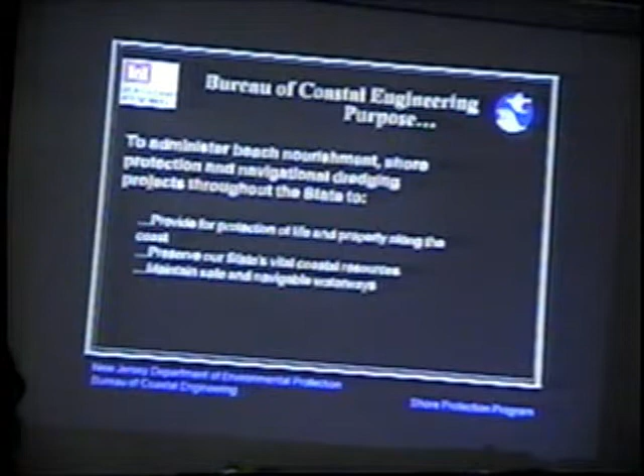The purpose of the state's Bureau of Coastal Engineering is to administer shore protection and navigation dredging throughout the state of New Jersey for the citizens of the state of New Jersey. I'm not going to read everything that's up there.

The legislature has provided stable funding for shore protection for the state of New Jersey through the realty transfer tax. Currently, our funding level is $25 million annually. That funding allows us to cost share with the Army Corps of Engineers and be able to match. To date, we've been able to match every federal dollar that has come to the state of New Jersey for shore protection for its citizens.

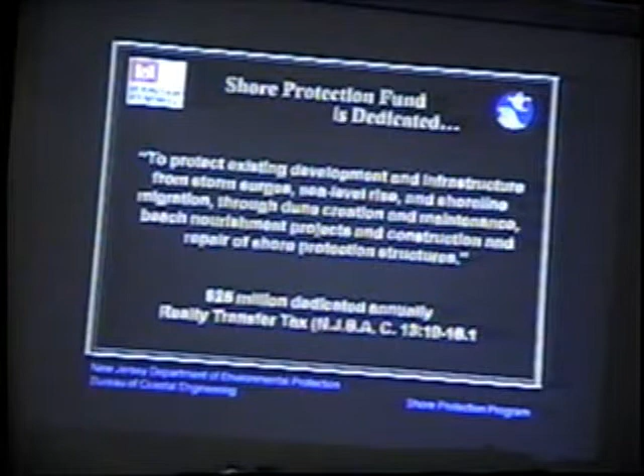How this money is broken up: the money is prioritized to federal projects, and they are broken down into studies, and then implementation of federal projects, either storm damage reduction, shore protection projects, and also environmental restoration projects.

If there's funding available after these projects are constructed, we also cost share with local municipalities to do just state and local funded projects, and we have done that very project with the municipality in the past. If anyone's familiar with Leeward and Maryvale Avenue, we did a state and local project with the municipality to provide protection to that area in advance of this project.

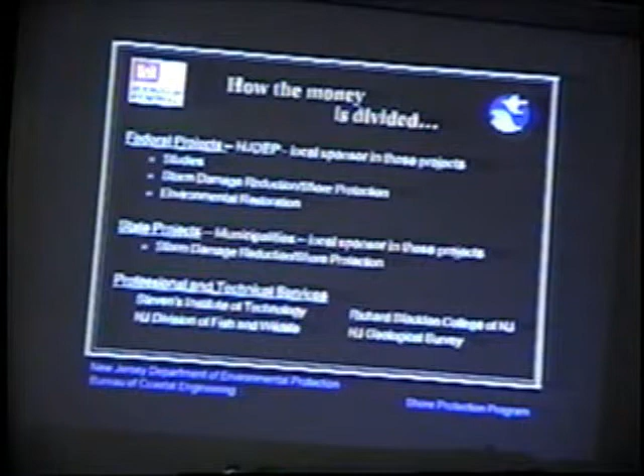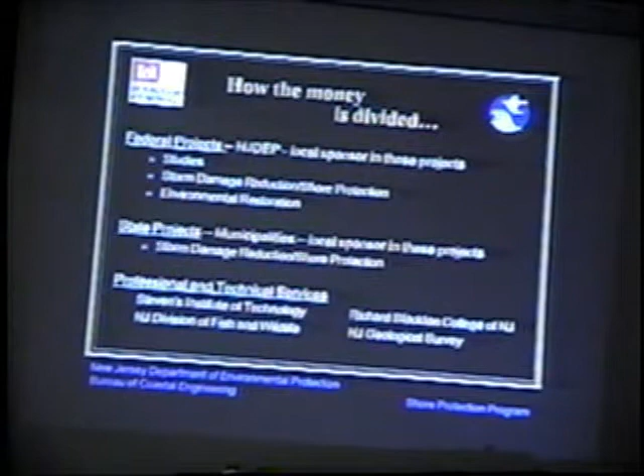We also fund Stevens Institute of Technology, Richard Stockton College, our Division of Fish and Wildlife, and New Jersey Geological Survey. Stevens provides us technical coastal engineering expertise. Richard Stockton College performs our beach profile network throughout the state of New Jersey. Division of Fish and Wildlife ensures that we're in compliance with the Endangered Species Act. And New Jersey Geologic Survey assists the Army Corps of Engineers in finding sand sources for these projects.

So here's why we prioritize federal projects versus state and local projects. Federal projects are typically cost shared 65-35. This particular project, Long Beach Island, initial construction originally was 65-35, and renourishments were 65-35. And then the local share is broken down into 75-25.

What that means at the end of all that is approximately just under 9 cents on the dollar is the cost to the municipality for a federal project. To do a similar project just with the state of New Jersey, on the other side you can easily see it's 25 cents on the dollar to the municipality.

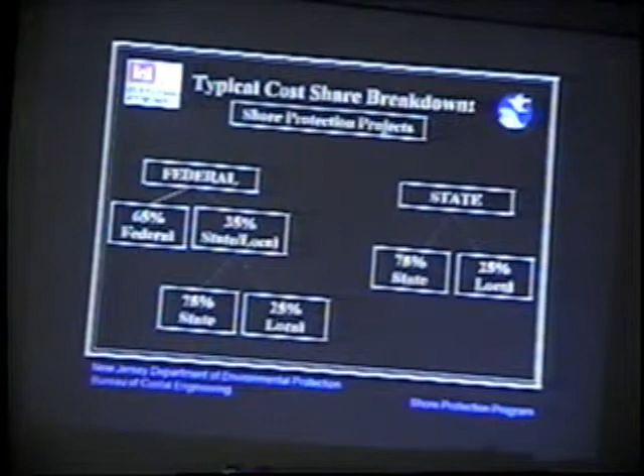In the wake of Hurricane Sandy, Sandy supplemental funds were authorized by Congress. This project was under construction pre-Sandy, and per that legislation, this project is to complete initial construction, is being done at 100% federal cost. There is not a cost share required by the state or the municipality to complete initial construction.

I will let Keith Watson, the project manager, go through some of the specifics of this project. Also, we have many other projects going on with the Army Corps of Engineers throughout the state of New Jersey. This is just one of them. There's been a major effort post-Sandy to complete all the authorized projects in the state of New Jersey.

All right, thanks, Bill. My name's Keith Watson, and I'm the project manager from the U.S. Army Corps of Engineers. We're based out of Philadelphia, so it's a Philadelphia District project. Again, I want to thank the mayor and the council for having us here tonight. The purpose of the meeting for us tonight is to get some of the information out to you on how the project's going to go, what authorities we're here under, and how successful we've been in other portions of the state as well as on the island, Long Beach Island.

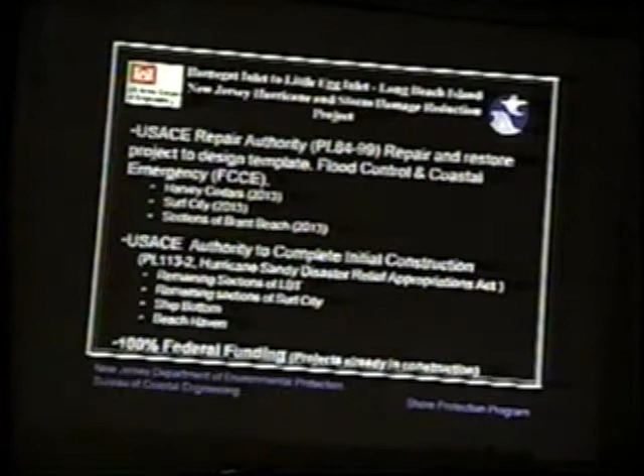I'm not going to bore you with all the bureaucratic stuff, but the Sandy Repair Authority out of Public Law 113-2, the Sandy Disaster Relief Appropriations Act, is what Congress passed to appropriate the funds and allow us to complete the project all at one time, which is a large lift. So everywhere else on the island, except for the previously constructed areas, is being paid for 100% federally. There is no cost sharing.

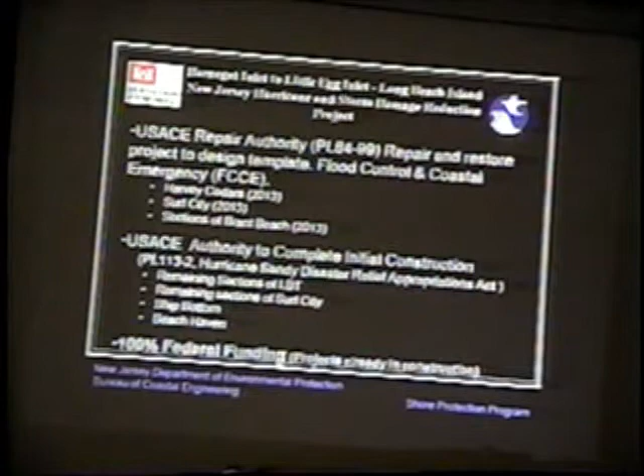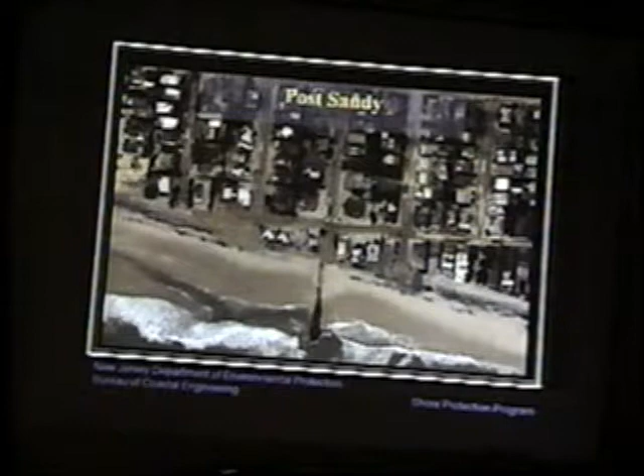These are areas of Beach Haven. Yep, these photos are from Beach Haven. This was down by Nelson Avenue. Like Bill was saying, this is where we had done a project back in 2008 to do a geotube project as an interim level of shore protection, to protect those homes that were down there and a few street ends that were adjacent to it.

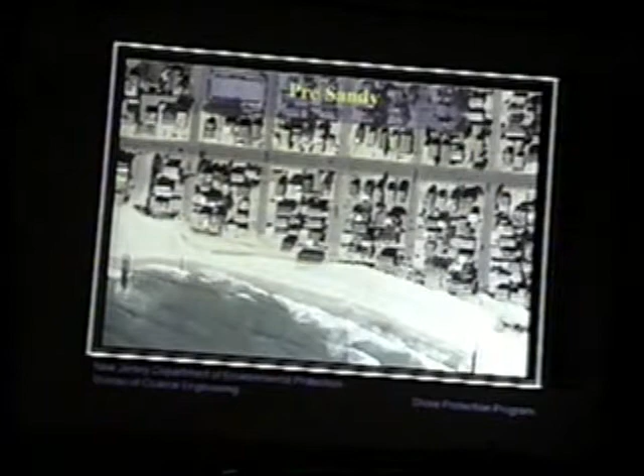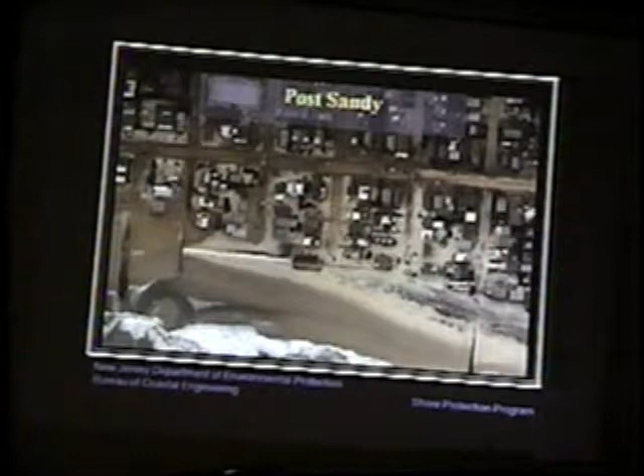In this photo here, you can see that there was some damage, significant damage to the south and to the north. And in the area where we had the geotubes, there was damage behind it. But if those geotubes hadn't been in place, it would have been a lot worse.

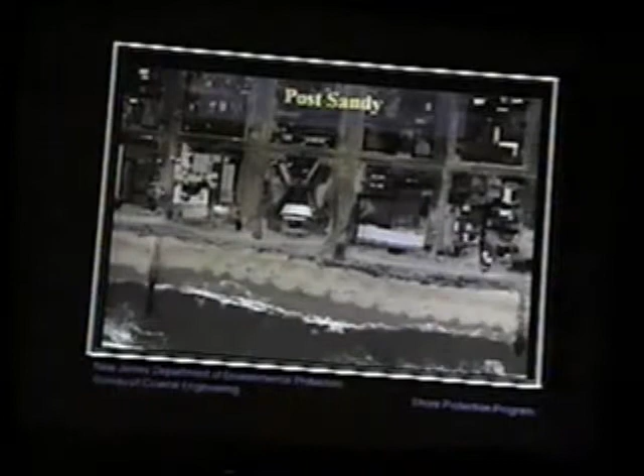This is the area up here by Center Street and Engleside Avenue, the Engleside and Seashell. This was before Sandy, this was afterwards. The dune system that was in place, which was fairly significant before the storm, had been washed away.

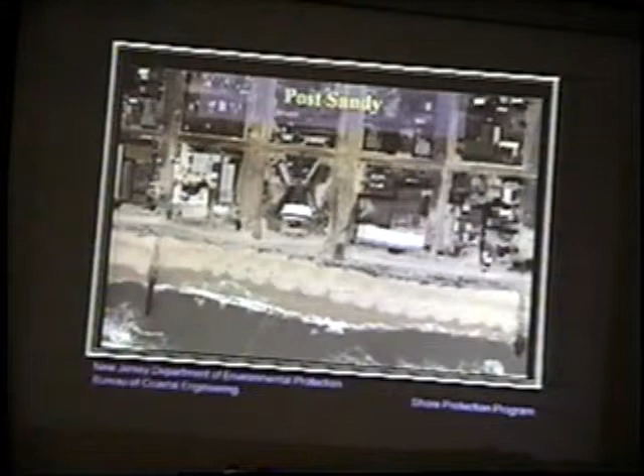There had been some overwash into the streets and the street ends, and material had washed through some of the buildings, went down the street, caused some damage to some of the structures that were there, and the municipality had spent a lot of money for cleanup, and so did the property owners who were adjacent to the beach. This was some photos from the street a couple days afterwards.

Once the public law was passed and we were able to embark, we did a Hurricane Sandy limited reevaluation report to make sure that the project was still able to be authorized and approved.

Then we signed a new PPA, which is a project partnership agreement, with the state of New Jersey in July of 2014. That is the key point where we were able to begin work on the project and the areas that would be done, including the state fulfilling their responsibility of obtaining the real estate. And that's still ongoing today.

Big point there was the contract was advertised and awarded December 5th to Great Lakes Dredge and Dock, who are one of the best beach fill contractors in the country. They have the most experienced company doing beach fills that we work with.

And Rich Johnson, project manager of Great Lakes, is here tonight. As we get into some questions later, he may be able to answer some of your technical questions about dredging.

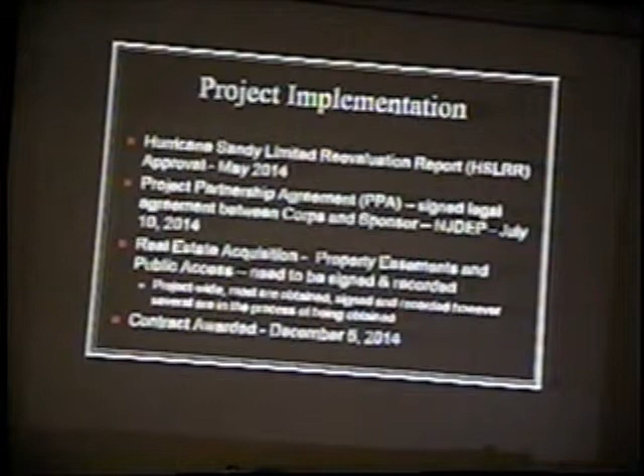All right, project detail.

Yeah, I do. All right, so as Bill and Keith both had mentioned,

As Bill and Keith had mentioned before, the state of New Jersey and the borough of Beach Haven are partners in this project with the Corps of Engineers, and there are obligations and requirements that the municipality needs to fulfill.

Essentially, what we will be doing is we sign a state aid agreement with the municipality. This just outlines what the municipality's role and responsibilities are with this project and entering an agreement with this project.

Some of those things are obtaining the real estate for the project, so getting the necessary easements that are required to do the work within the project footprint.

Also, whatever maintenance activities that the municipality needs to do to the beach in between renourishment cycles, or after initial construction and in between renourishment cycles.

The activities have to be obviously consistent with the coastal zone management rules of the state of New Jersey, and they have to be consistent with the language that's in the easement.

Essentially, it's to ensure that the town isn't doing anything to the project that's going to jeopardize the longevity or the lifespan of the project or the performance that it was designed to reach.

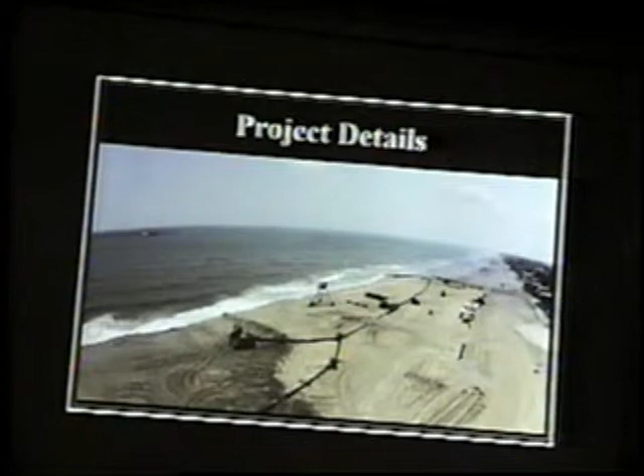So this project, the dune that's being constructed, again, was studied and was found to be the most cost-effective solution for the federal government to reduce damages for Long Beach Island. And that's a design dune of 22 feet elevation.

That's not height off the ground. That's the North American vertical datum plus 22. That's the top of the dune, and that dune is approximately 30 feet wide at the top, and it takes up 150 to 170 feet depending on the elevation it comes to in the back and front of the slope.

The beach berm is the average natural berm on the island, whereas the flat portion before it slopes into the water is about 8 feet NAVD. And again, that slope is on average 1:10 going into the water, down through mean low water. I know that's an issue and a topic, and we'll talk more about that later.

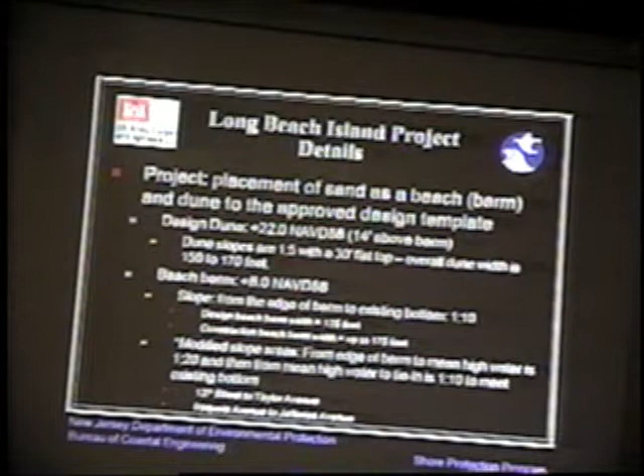Go to the next slide. So the overview: the project is almost 18 miles long, building 63,000 linear feet of beach and dunes that are going to be constructed. Almost 10,000 feet of that in Beach Haven.

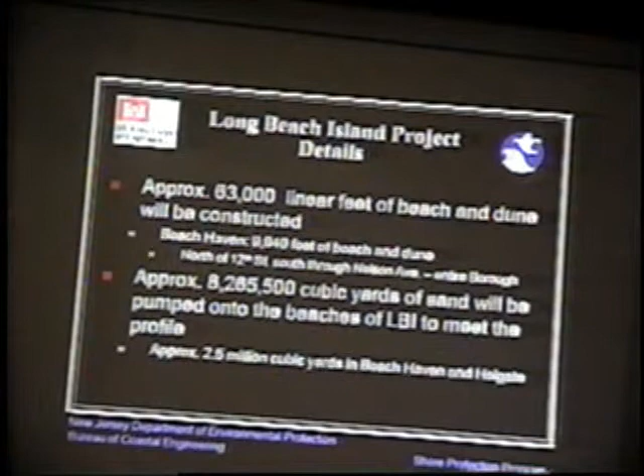8.3 million cubic yards of sand are going to be pumped as part of this phase of the project. 2.5 million from Beach Haven to the end of the project in Holgate. So, the sand for the project.

During the feasibility study, extensive investigations were undertaken to find suitable sand, and sand that other interests will let us use and borrow and put on your beach. So it's an ongoing struggle of finding enough approved sand borrow areas. There's plenty of sand in the ocean, but we're not allowed to take it.

There's other competing interests among those fishermen, among those other companies. There's federal waters, there's state waters, and it's all different. So we were successful in getting one large area that we call Area D, which is offshore of Harvey Cedars and North Beach. Half of it's in federal waters, and half of it's in state waters.

We began the project in Surf City and Harvey Cedars and the north part of Brant Beach with the D1 state waters, in state waters.

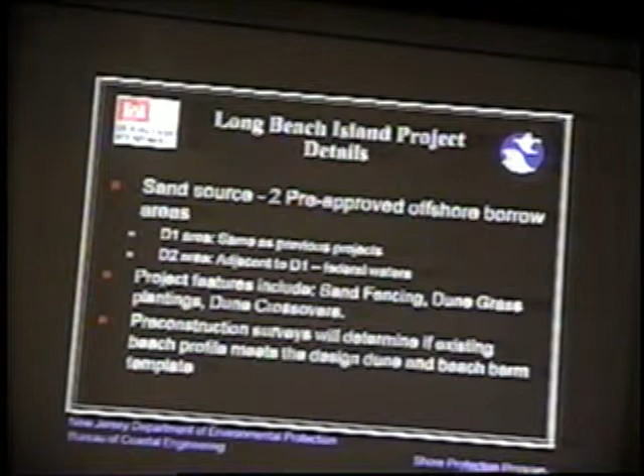So this just shows the typical cross-section. You can see all this stuff on our website as well. We have the feasibility study that was authorized to build the project. There's all the design information in there. You can see the typical beach.

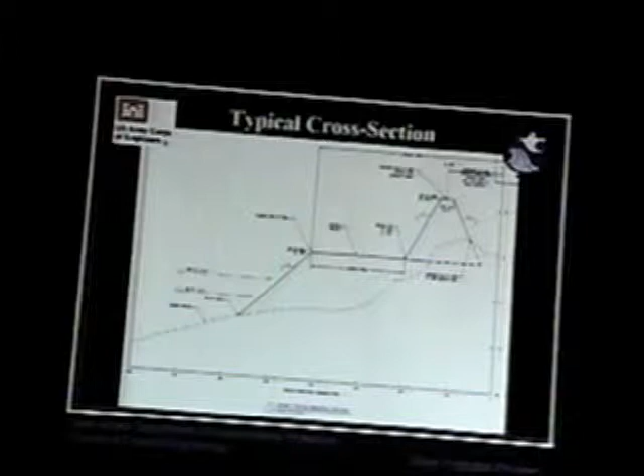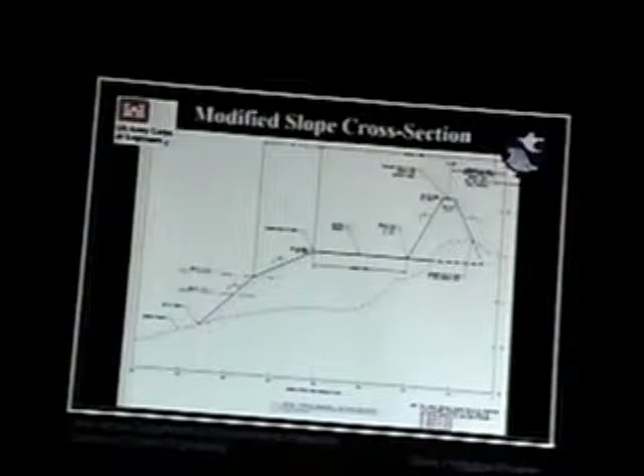Part of the project, through some discussions with the municipalities, we tried to modify a slope in a few areas. We can do this on small areas that don't affect the overall integrity of the project. You get enough sand, we balance the sand, and we're monitoring what's happening at these areas where we built them. We built a few in Harvey Cedars to start. Ship Bottom was just completed, and we will be building them through the township and at a couple locations in Beach Haven, and we will be monitoring how that beach performs. It's simply a 1-on-20 slope from mean high water up to the berm, where the natural slope is 1-on-10 in that area.

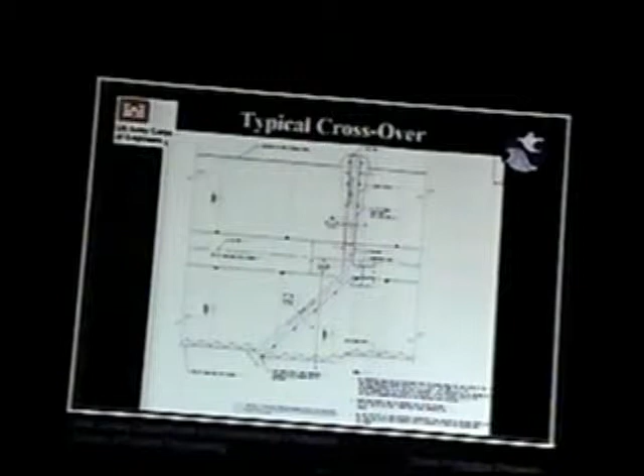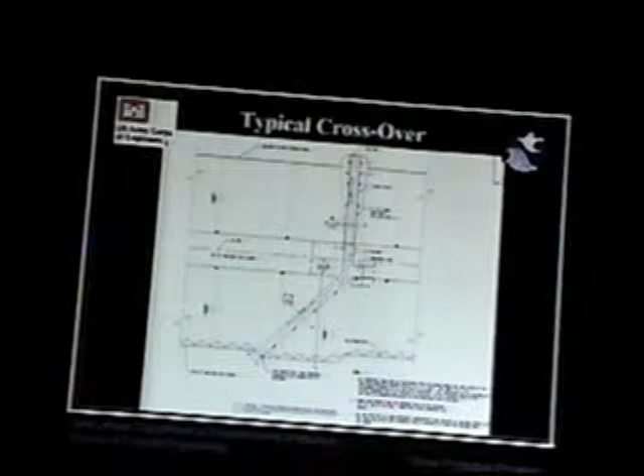At each project, I know there was some concern on how do we get over the sand dunes, which are going to be much larger than you're used to. What we've built in other projects in New Jersey, on Long Beach Island, and elsewhere throughout the country are hard packed surfaces. It's a road base, a mix of gravel and sand, and it packs down and makes it a lot easier to walk over than just walking over sand, which is very challenging for even the most healthy of us. So we recognize that, and we worked with each municipality to design something that each municipality wants. So you'll see it'll be a little bit different in Harvey Cedars, a little bit different in Surf City, through the township, and in Beach Haven.

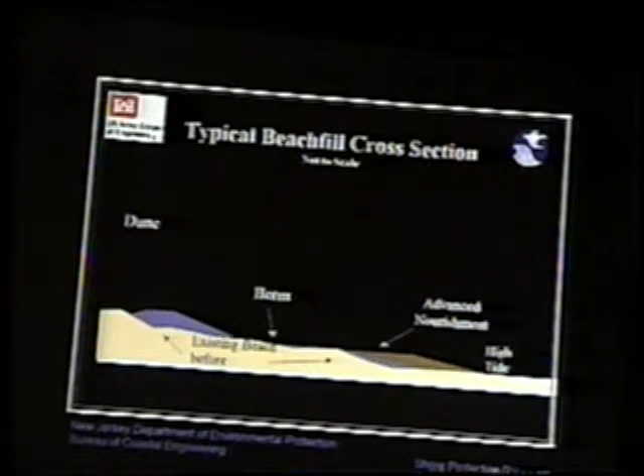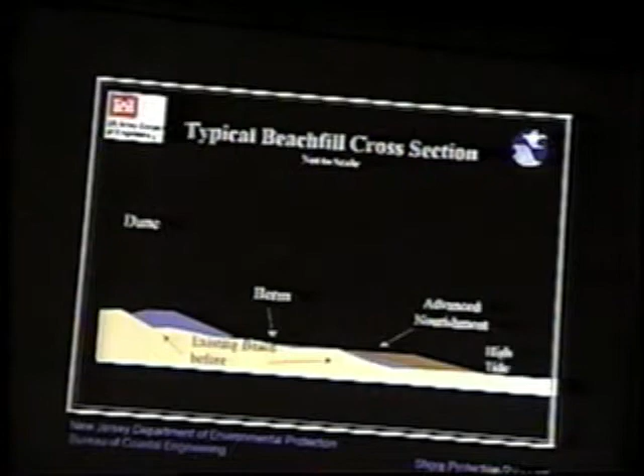So when you see a beach fill being done, you see a whole bunch of sand, you see a whole lot of activity going on out there. But what you're actually seeing is the beach being placed with the sand that's going to nourish the profile under the water. We can't put sand in the water and know where it's going to go. So anywhere below mean low water, it's a crapshoot. The waves, depending on how stormy it is, that sand will go anywhere and we can't account for it. We can't pay the contractor for it. So that's a big issue.

So when we build these projects, the reason the berms initially are 400, 500 feet wide is we put the advanced nourishment quantity out front. That's what that brown arrow there shows, advanced nourishment. So that's why the beach is so large when we finish. And we know it's going to adjust. We count on it adjusting. That's just what has to happen when we build these projects.

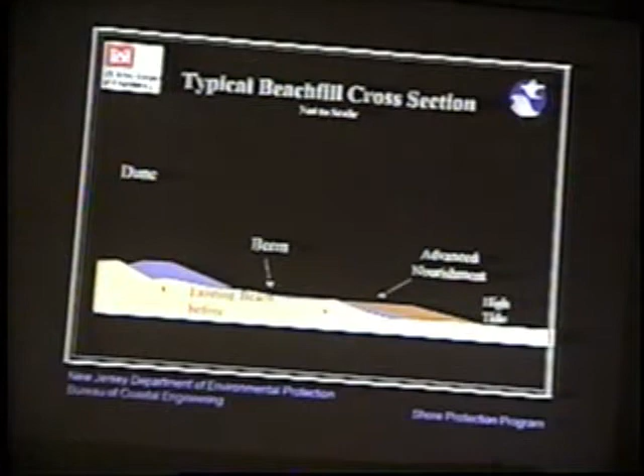I'm going to turn it over to Chris, and he's going to tell you a little bit about what you're going to expect when you see the dredges and you see the workmen on your beach.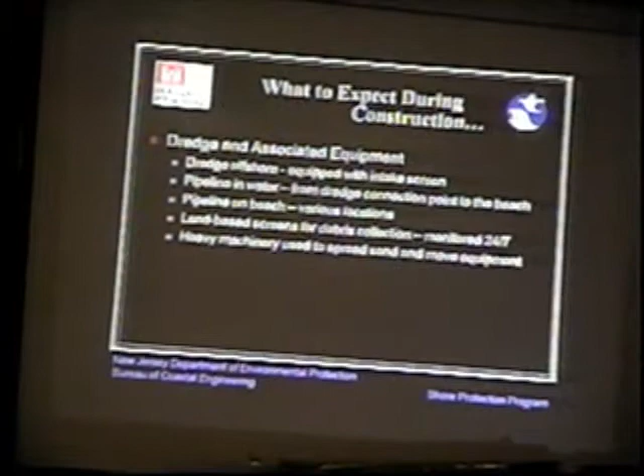Okay, I'll go through some of this pretty quickly because I know a bunch of you probably went up to some of the project areas and seen what's going on. But essentially we're going to have the dredge, 4 dredges offshore. Each of those dredges is equipped with screens to prevent debris coming into the hopper of certain sizes. The screen size on that is 1.25 inches by 6 inches, and that's to keep some large debris from coming into the hopper. There's going to be pipeline in the water.

Some of you have seen it where the boats are hooking up offshore. And then there's also pipe that's sunk on the bottom, and what they do is they actually hook up to those pipes and place the sand through those pipes onto the beach. You'll see pipeline on the beach at various locations. To maximize efficiency, Great Lakes is landing the pipeline onto the beach at multiple locations. This way their production numbers can stay high and they can stay up with Mother Nature as best as possible when they're filling, because they're working against tides, currents, storms, and stuff along those lines.

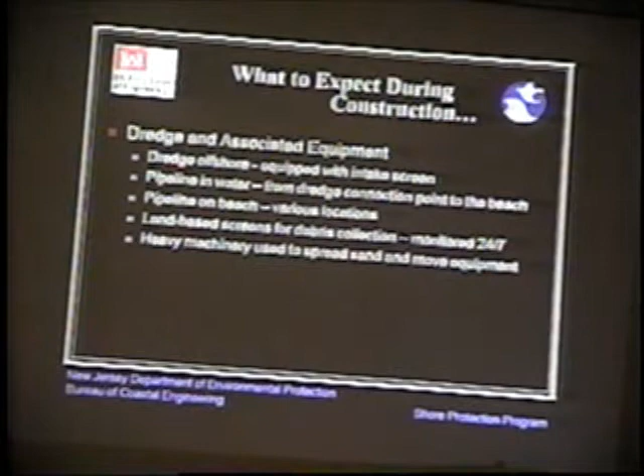We have screens that are on the beach, you'll see photos. We use the screens, they have a small 3/4 inch by 3/4 inch mesh, and this is to keep the smaller debris from coming out onto the beach. And what we do is the State of New Jersey and the Army Corps of Engineers go through the screening to pull out any debris and make sure that nothing dangerous is there. If something is there that we have to be concerned with, we have appropriate measures with the contractor, with the Corps of Engineers, and with the appropriate authorities to deal with whatever we find.

And also, there's going to be a lot of heavy machinery on the beach to move around the sand and move equipment around to go from site to site.

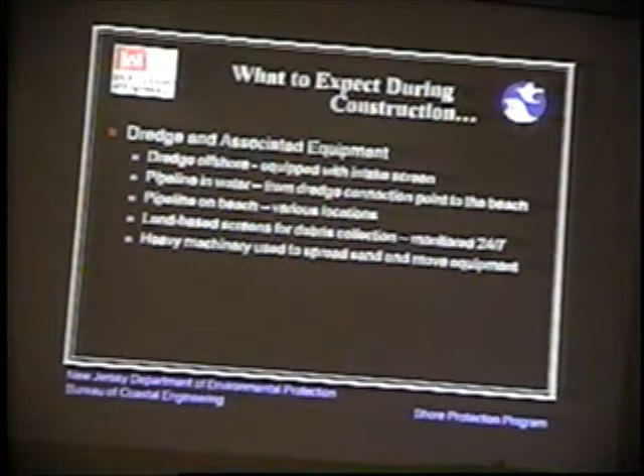The boat then navigates to the fill site and hooks up to the floating line that's offshore. They have their own pumps, and they pump through the pipe onto the beach.

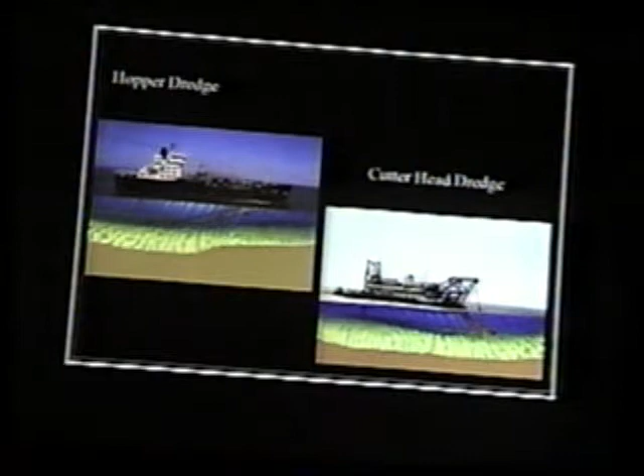The other type of dredge we've seen on this project up in Brant Beach in 2012 is a cutterhead dredge. Essentially it does the same thing, drawing in sand, but it stays at a fixed location and pumps more continuously than the hopper dredge does.

This is just an aerial photo of what's been going on at the beach fill. Like I said, you've all probably seen it. In these photos you can see the baskets and pumping through the baskets, and the dredge offshore, the crab out in the water.

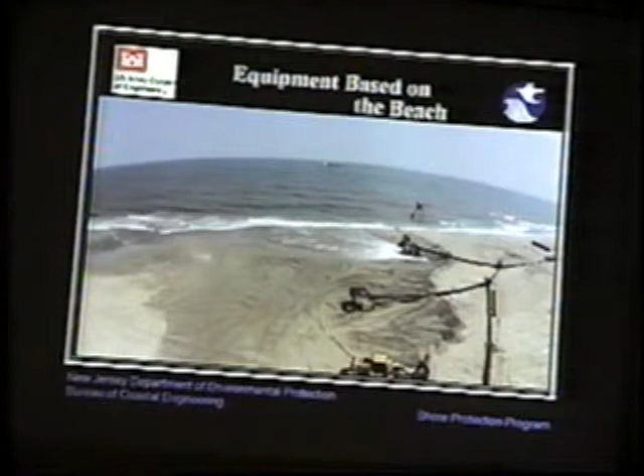What the crab does is take topographic and bathymetric surveys to measure the existing condition of the beach before we do the beach fill, and progress surveys during the fill. At the end, they do a final survey, accounting for how much sand they placed on the beach, which allows them to get paid. This is just a closer shot of the crab.

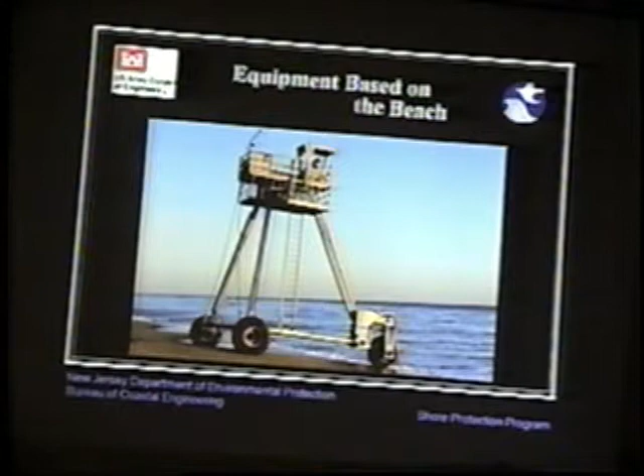The crab is approximately 35 feet tall. It's used to survey and has a GPS unit on top. Those are at a fixed height above the bottom of the wheels, and they use that to measure the bottom elevations.

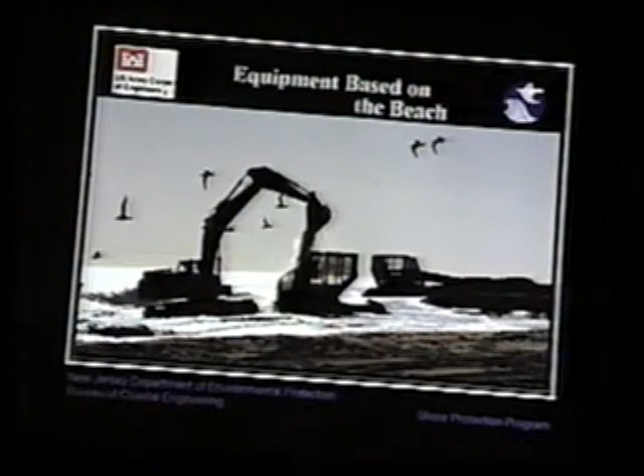There are excavators being used throughout the project for multiple purposes. Some are for cleaning the baskets, some for moving equipment around, and also for bringing material and aiding the bulldozers to fill sand into the fill area of the beach.

And we have a bulldozer. You can see a few of them on the project. You'll probably hear them as well.

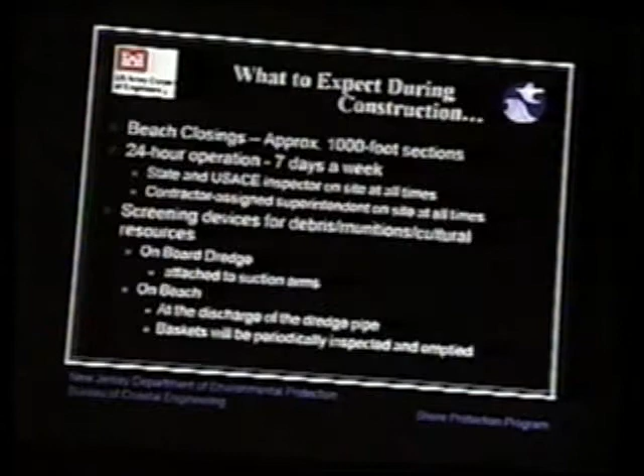Essentially what we have during the project is beach closings that go over approximately a 1,000-foot section. In the contract, there's a line item for the contractors to keep that work area within that 1,000 feet. What that does is help them maintain safety from the public and the people around the area, and it also minimizes the disturbance to the beach and to beachgoers, especially during the season.

Operation is 24 hours, 7 days a week until we are done, with the exception of equipment malfunction or significant weather. So they will be out there doing what they do constantly until they're done.

There will be lights up on the beach that they're using so they can see what's going on. They will have beepers on the back of the heavy equipment so it's safe for the employees working on site, so they know what's going on and who's around, because the visibility is limited.

The State and Corps will have inspectors on the project and near the project at all times, as well as project engineers and project managers. The contractor also has superintendents assigned to the whole project, but also sub-superintendents assigned to each of the shifts, to make sure all public safety protocols are followed, operations run smoothly, and to notify all the appropriate groups in the event that something happens.

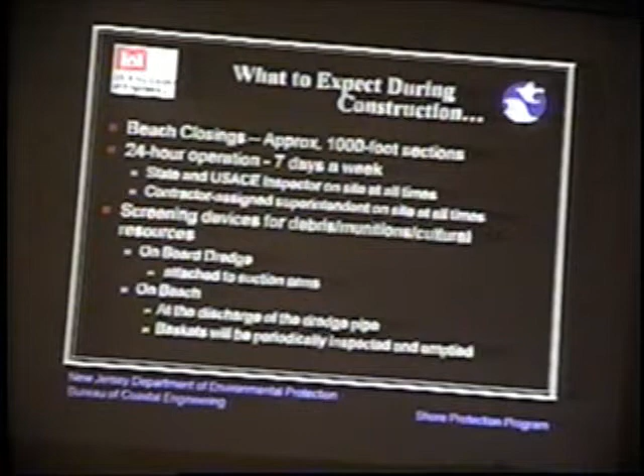Like I said, we have screening devices for debris on both the dredge and on the beach, and they are maintained and inspected periodically.

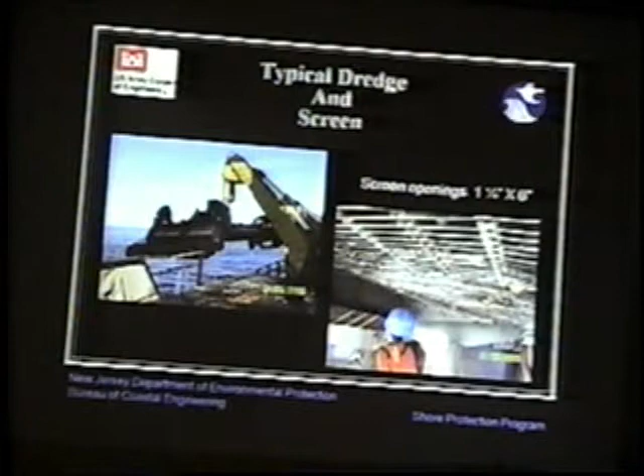This is just what the typical drag arm looks like on some of the dredges. It's pretty large - as you can see, the gentleman is standing underneath the screen for a little scale there. This is from a dredge on another project. It's 1.25 by 6 inches.

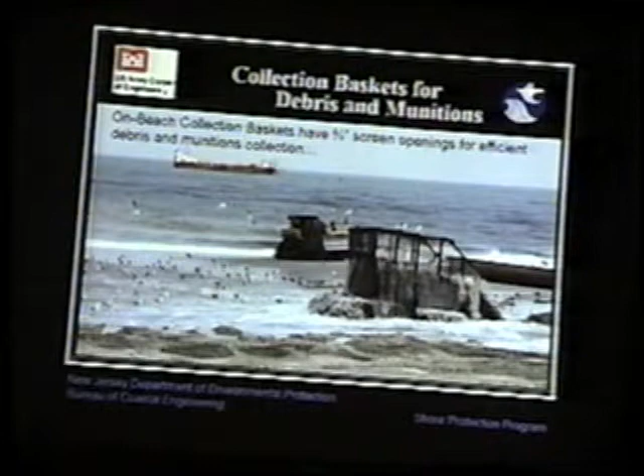So we had some frequent questions, so...

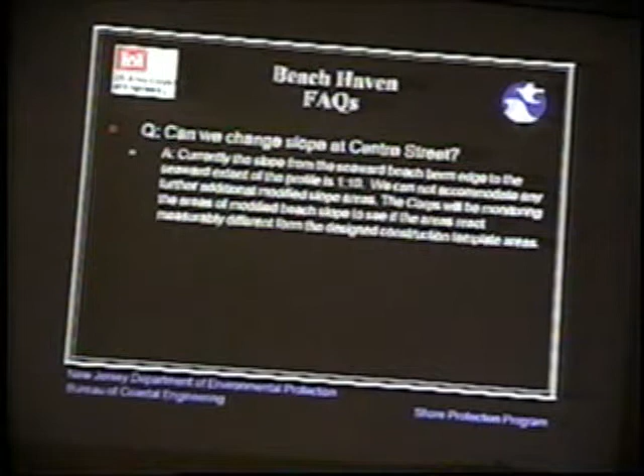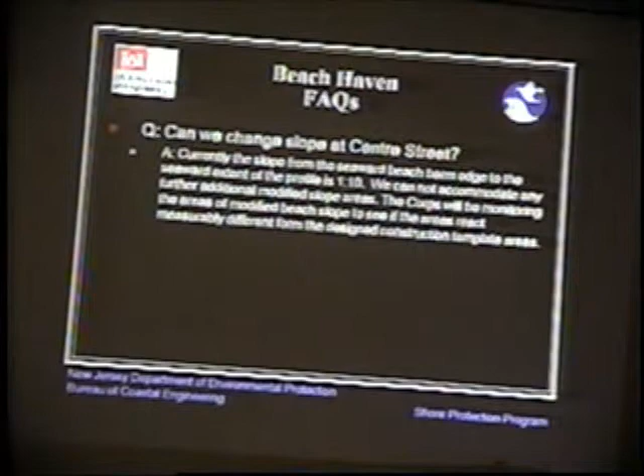To answer the gentleman's question about when we'll be in Beach Haven: this project has been broken down into 6 sections. They just completed section 5, or area 5, which is directly north of Beach Haven. Beach Haven and Holgate are considered area 6. The contractor is currently working in area 4, in Long Beach Township near Brant Beach. They anticipate beginning work in Beach Haven around January 1st, and it will take approximately 100 days to complete all of Area 6, which is all of Beach Haven and all of Holgate.

They will start at 6th Street in Beach Haven, which will be the first sub-line landing point, and work from there up to 12th Street. So that's approximately when they're going to be here.

The contract completion date for this contract is in April. I don't know the exact date, but sometime around tax day, all the beach fill for all of Long Beach Island is supposed to be completed by that time frame. What does that mean, 'supposed to be'? Well, there's weather. You have significant weather.

I know I'm not supposed to interrupt, but what happens if we go past the 15th in Holgate? Do we get replenished? Sorry about that, sorry.

The project has an end date. All contracts have end dates, and they can be extended due to weather or changes in the contract. Right now, there are no changes that will extend the time frame that I'm aware of, but anything can happen. As of right now, the beach fill portion of this entire project is supposed to be completed in April. If we get significant weather, that will be delayed and extended.

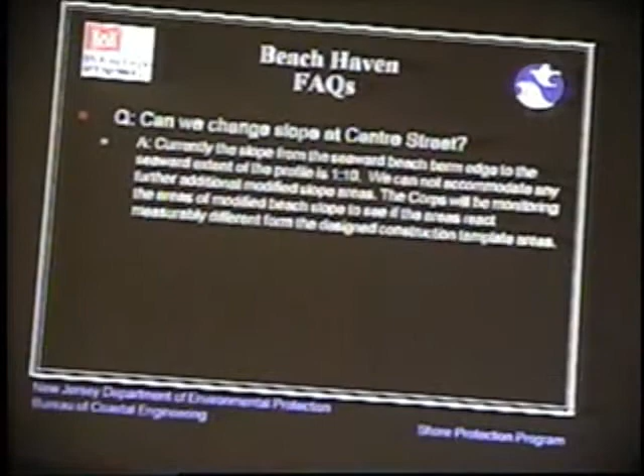In preparation of the meeting, we knew there were a lot of questions that people had, so the ones we knew about, we prepared our answers ahead of time so that you have the information.

So the big one: can we change the slope at Centre Street? At the moment, we are doing two areas in Beach Haven where we're going to try that modified slope. Right now, we cannot change any of the other areas. We'll be monitoring all the areas, and we will be ready the next time around if there's any noticeable reason to do it. We would then look at that information and modify from there. But under this contract, at the current time, we will not be able to fill that area at a different slope.

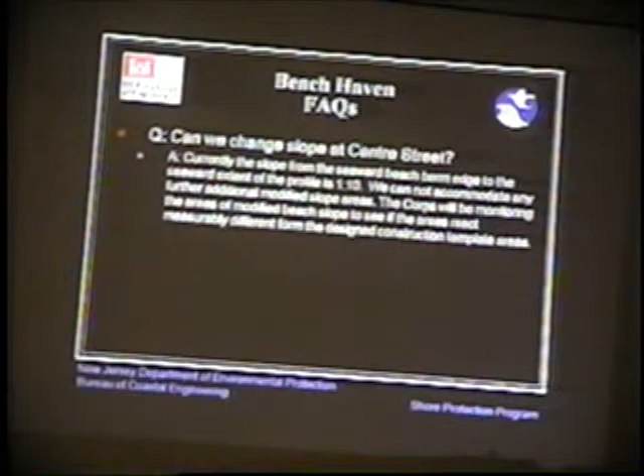That leads right into the other question, essentially the same question, except where they want to do the entire town at a modified slope. It's not feasible to do that for the remaining beaches. There are mechanical reasons, practical reasons, as well as budget constraints on reasons why we can't do it.

As I said earlier, we can only control the sand down to the mean low water line. After that, you're pumping it into the ocean. Depending on the wave climate of the day, you can't guess where the sand's going, and you can't make it stop. It's going to just flow out and go wherever it's going to go. So we can only control the sand down to the mean low water line. After that, Mother Nature and the waves are going to work the sand and put it into its configuration. It's going to reach its own equilibrium based on the amount of sand that's in the system.

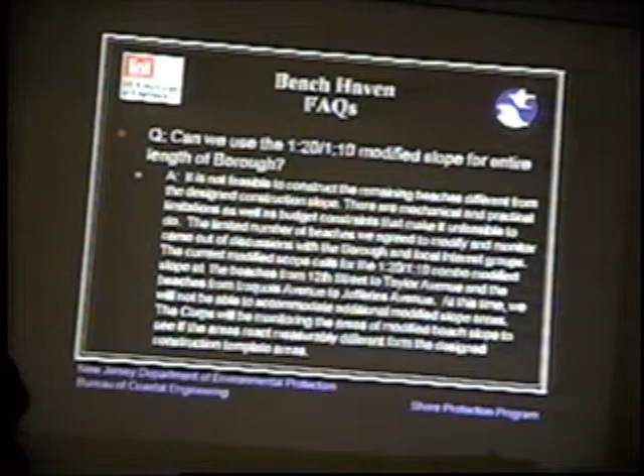That includes all the sand we're putting in from Loveladies all the way down through Holgate. That sand is going to work in the system with the natural currents and waves, and it's going to reach its own equilibrium slope very quickly, regardless of what we do.

With that in mind, Dr. Friebel is here tonight to give a little discussion on what we've found to date from some of the modified beaches we've already done, namely in Harvey Cedars. So we are giving thought to everybody's suggestions, we are taking them to heart and looking at them, but from a scientific and data-driven way, not on perception or what people think is happening. With that, I'm going to turn it over to Dr. Friebel, who has prepared a very good presentation.

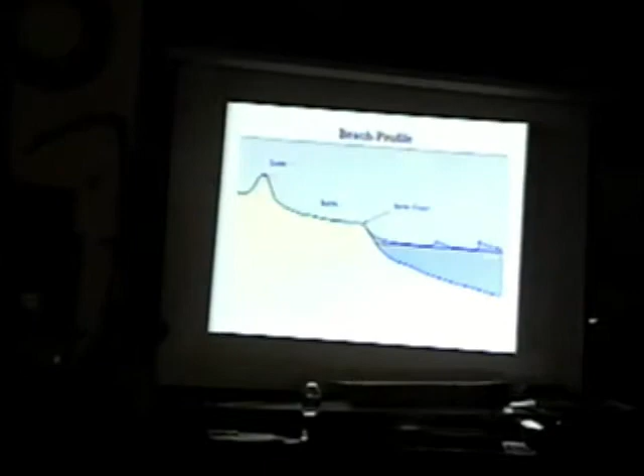Just a quick overview of what the beach is and the beach project. The dune is the primary mechanism for our storm damage reduction project. It's the meat and potatoes of what we're putting out here to protect the infrastructure behind it.

The berm, I hate to use the word sacrificial, but it's there. That's the recreational part where we put our chairs and towels when we enjoy the beach. But the berm is there to protect the dune. That's how Mother Nature designed it, that's how it functions. If we walked away, that's how all natural beaches look. The berm crest is the break point where it starts to slope down, at an elevation of about +8, sloping into the water.

What Keith was alluding to, and he did a good job, might be difficult to understand, but hopefully if I explain it, it'll make more sense. Mother Nature is the best at doing what she wants to do, she is the best at protecting herself. It doesn't matter, and I'm going to show you the data, if we place the beach at 1 on 50, 1 on 20, or 1 on 5. Nature is going to evolve the beach profile the way it wants to, as a function of both the grain size on the beach and the wave climate.

Harvey Cedars is a very unique barrier island. It has a very steep, deep offshore, so you get a lot of wave energy that impacts and rolls up on the beach. It's why it's one of the best surf spots in South Jersey. I would go to say it is the best surf spot.

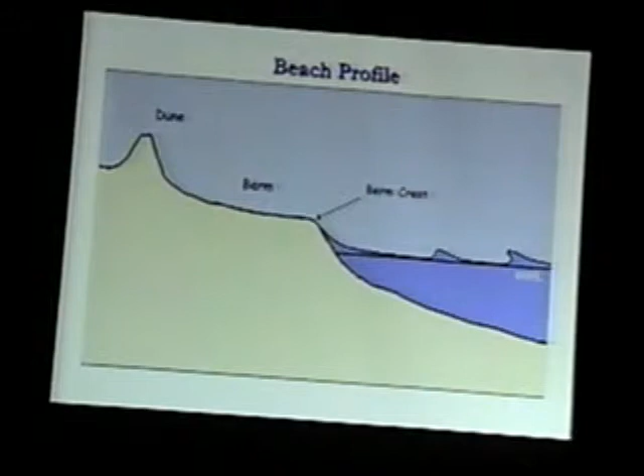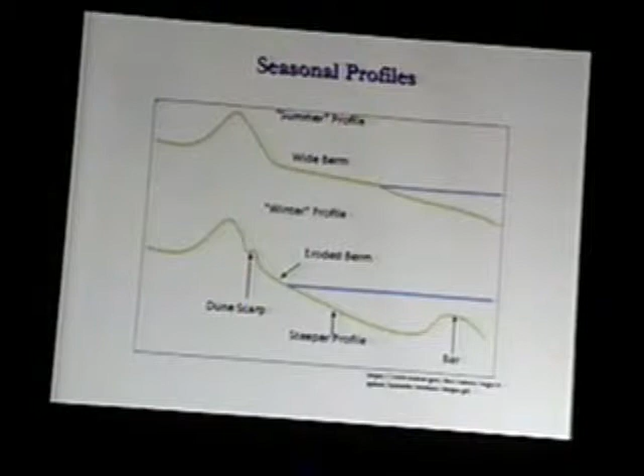As fall and winter come, the wave climate gets energized, we get bigger waves with much more energy. Those waves start eroding the wide berm from the summer profile and deposit that sand into an offshore bar during winter. Mother Nature does a very effective job because as that offshore bar builds, the waves break on it, dispersing the energy in the water rather than up on the beach berm. So the beach might get really narrow in winter, but all that sand is sitting offshore.

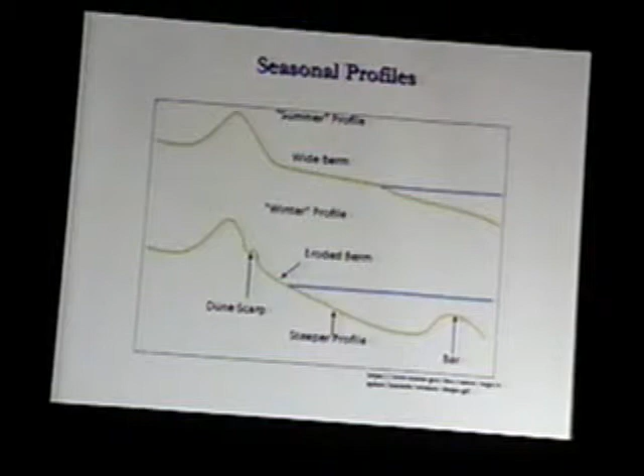Then as spring and summer come and the wave energy dies down, we get smaller waves. It's terrible for surfing, I know because I used to surf here in high school. Those small waves with long periods, 8 to 10 seconds between each wave, push the sand back up onto the berm and create a wide berm for the summer. So nature does her work protecting the beaches by herself: big waves erode and build a bar, dispersing energy offshore so hopefully the beach and dunes stay protected, and then in summer those smaller waves build the beach back wider again.

Just want to talk a little bit about our construction profile. When we design our beach, we have the existing beach, and then what we want to put out there is a defined berm width in front of our project, in front of the dune. We estimate that between the time we come back to re-nourish, we will build what's called a design width, and then we're also going to add advanced nourishment, which pushes the berm out even further seaward. So at the end of the project, when we're done with initial construction, you're going to see the widest beach possible, but it's not going to stay, and I'm going to explain why.

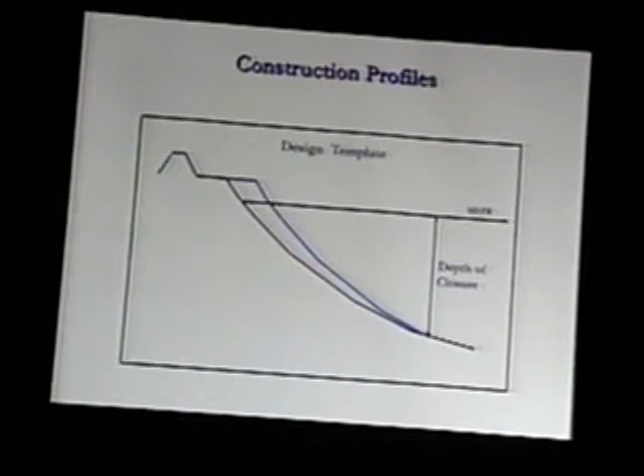As we talked about earlier, we have limitations of how we can work the sand. We cannot place sand mechanically under the water at a fixed slope. We don't have dozers that go underwater. So what we have to do is build out the beach, pump the beach, and push it out further and further into the ocean. Then the wave climate, that winter season, will adjust the profile.

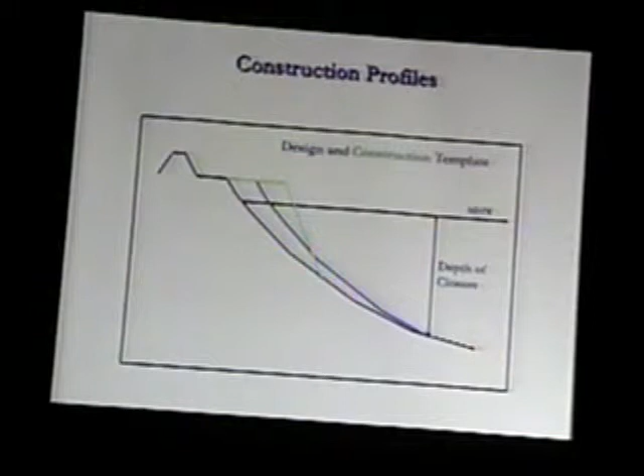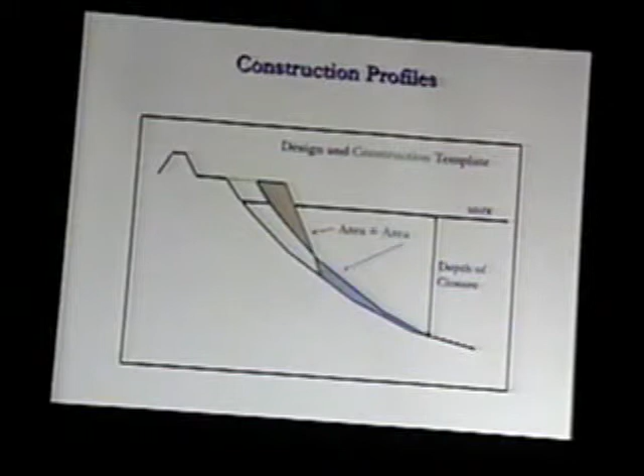So even though I wanted, if you saw on the previous slide, the blue line, which I call my design slope - that's the additional sand I'm adding to the berm - I can't get it all underwater. So I have to make what's called a modified construction template, where the berm is much wider and it intersects the ground at the point shown. Essentially, the light blue area, which is my typical design slope, my design profile, that volume that I can't mechanically place because it's underwater, I put in the orange shaded area so that the two areas match. All the volume is there, I just can't mechanically do it myself - when I say that I mean the companies. So we have to wait and rely on Mother Nature to move that sand from the upper part of the berm into the offshore, between -10 and -20, -25. We physically, our engineering, cannot do that.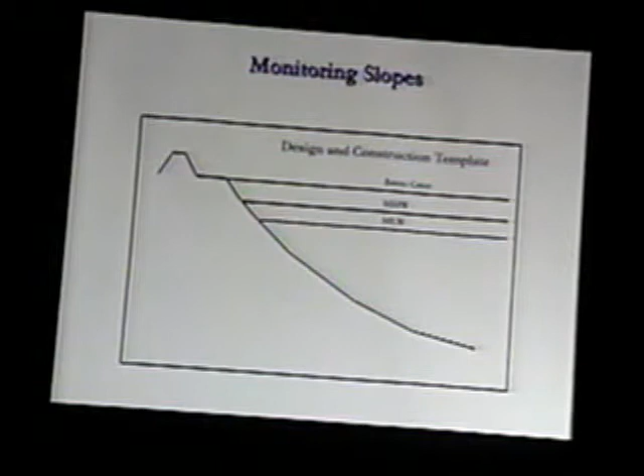When I talk about the design and construction template, we have the berm crest - again, that's the +8 where it goes into the water - and we'll look at mean high water and mean low water lines.

So we've looked at the slopes, and this is new data - or I should say, a new way to present it. I wanted to look at the slopes from initial construction in the towns we worked on: Surf City, Harvey Cedars, Brant Beach, and Beach Haven. I wanted to show some data about the slopes. Since Surf City was constructed in 2006, we have a lot of data there - we actually have 23 different surveys collected. Surveys are very expensive to collect, almost up to $2,000 per line.

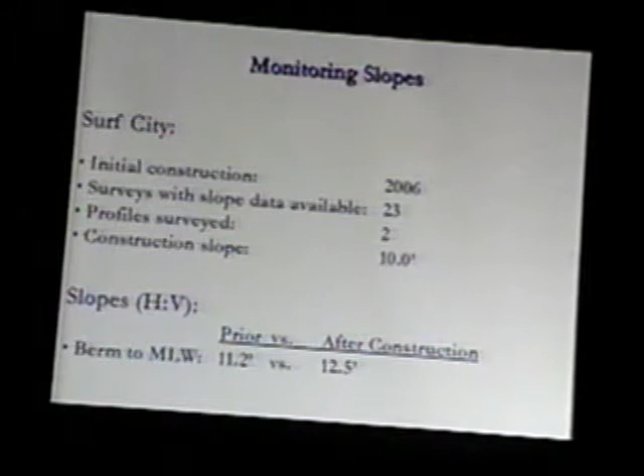Looking at our historical database, I had two profiles in Surf City that I was able to analyze over the long term with those 23 surveys. Surf City was constructed with a 1:10 slope. Prior to construction, looking at our monitoring data, before we did any work the slope from the berm at +8 to mean low water - our limit of where we could mechanically place sand - was about 11 to 1. After construction, we've been monitoring the beach, and it's actually flattened, surprisingly to me, to about 12.5 to 1.

Harvey Cedars we did in 2009. I had 8 surveys I was able to look at, across 5 profile lines. Again, it was constructed at 1:10. The slope from the berm to mean low water was about 11.4 to 1. After construction, analyzing all the surveys, it again flattened to 13.9, looking through October 2014, our last monitoring survey. This isn't just selecting one profile survey - this is all the surveys after construction, looking at them all and taking the average.

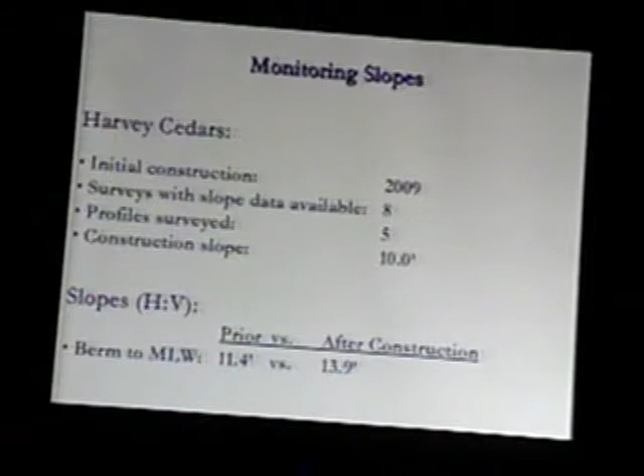Brant Beach, again, was constructed in 2012. We have 19 surveys there, and looked at 5 profiles prior to construction. The average slope was about 10.5 to 1. Post-construction - and it was only completed in 2012 - it's flattened to 13.8.

If you think about it, it actually kind of makes sense. Long Beach Island was in a very sand-starved state. You didn't have a lot of sand in the beaches, your groins were sticking out, the beaches were narrow. Finally, we're getting some sand into the system, and that sand is dispersing from other parts of the project, and it's starting to flatten out.

So as we build more and more parts of this project, I think what you're going to see is some parts that were historically steeper flatten, and this might fluctuate, but on average the slope on this island is approximately 1 on 10, and as we're adding more sediment to the system, it might flatten out to 1 on 12 or 1 on 13.

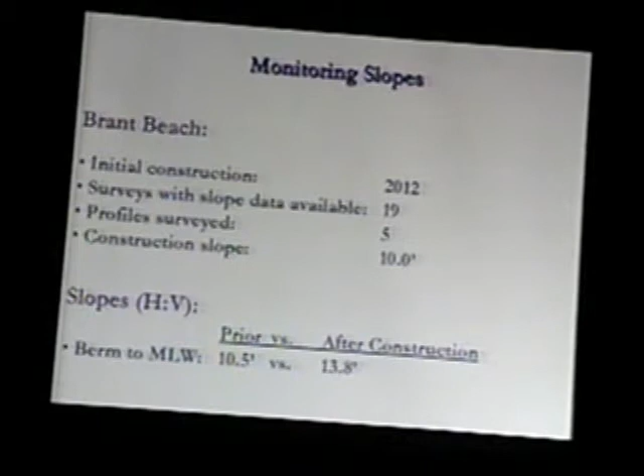Beach Haven, where we are today, I looked at our survey data. We only have 3 surveys to date because, again, we don't have a project here, and it's very expensive to collect surveys. The existing slope in Beach Haven is about 13.2 to 1. So it's not 20 to 1, it's not 30 to 1. The average slope from the berm to the mean low water is about 13 to 1.

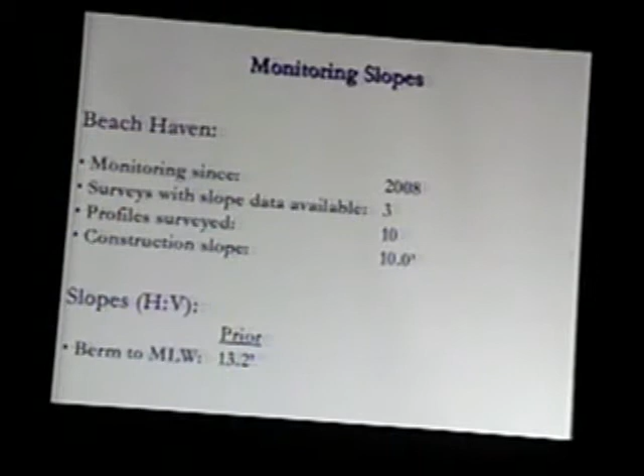In 2013, we were requested by the Borough of Harvey Cedars if we could do a modified slope. The Corps met with the local interested parties, and we decided we would take a shot and see if we could modify the slope. What we decided to do is try to construct a slope of 1 on 20 versus the 1 on 10. It wasn't my recommendation to do that, knowing how Mother Nature's going to do what she wants, understanding the grain size of the beach, but we wanted to give it a shot anyway.

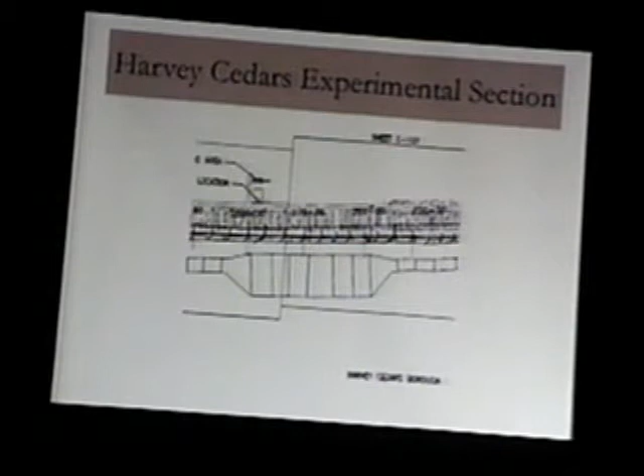Who knows, maybe something fantastic would have happened. So again, we sloped the beach from the berm crest to mean low water at 1 on 20. I have 6 sets of surveys available, and we have 3 profile lines that we monitor.

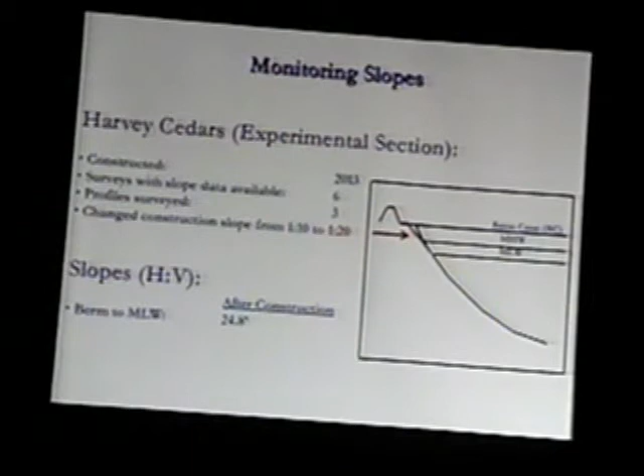Immediately after construction, the slope went from 1 on 20 to almost 1 on 25. That's just a function of there being so much sand in the system, the waves start grabbing that super wide berm, that construction template, and it starts flattening out. Here's a profile with the 1 on 20 construction template. You can see how it breaks at the mean low water, and then below that it's 1 on 10. Immediately after construction, it was actually a little flatter than the 1 on 20.

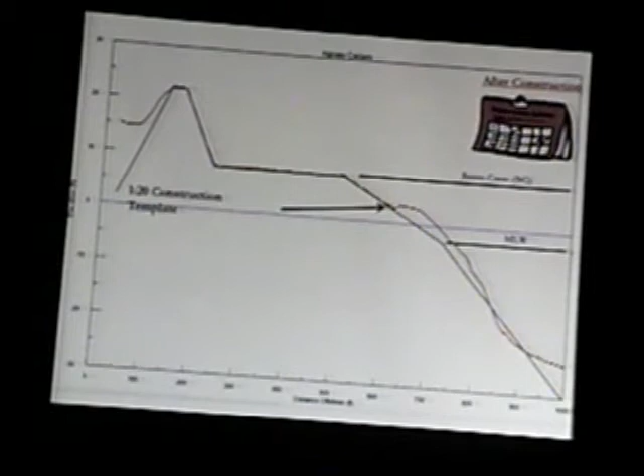1 month later, we came back, we monitored, and looked at those same lines again. The average slope went to about 1 on 17. So it went from 1 on 24 to 1 on 17 in a month.

And here again, you can see it cutting back, going to the natural slope of the island. 2 months later, approximately about the same, it's about 18.6 to 1. 3 months later, about 17.7 to 1. And finally, 1 year later, we came back, and the beach was eroded, and it's about 7 to 1.

Harvey Cedars is one of the steepest areas on the island, so we expect it to be that way. The average slope on this island is 1 on 10. So if you have some beaches that are typically above 1 on 10, say 1 on 13, 1 on 14, you're going to have some that are steeper than 1 on 10. And here's a profile shot.

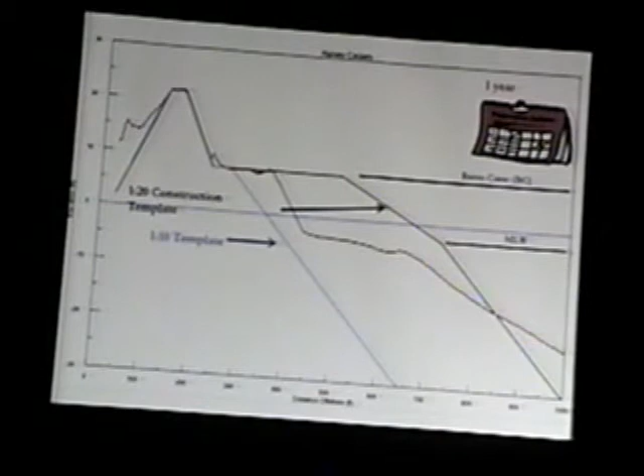And then what I want to do is demonstrate: in Harvey Cedars, when we did the 1 on 20 construction slope, we also had some control lines that we built at our typical 1 on 10. So I just want to show a side-by-side comparison. On the left-hand side is the 1 on 20 construction slope, and on the right-hand side is the 1 on 10. So immediately after construction, you can see the profiles.

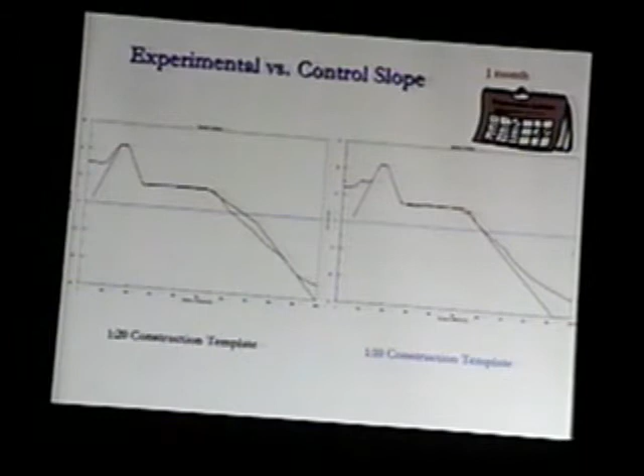1 month later, you can see on the right-hand side it's adhering to the 1 on 10 profile, and the 1 on 20 is starting to steepen up. 2 months later, they look almost identical. 3 months later, again identical. And 1 year later, just about identical.

So the point I'm trying to make is, if we could build it 1 on 20 and it would stay at 1 on 20 or 1 on 30, it would be worth pursuing. But understanding that it's not up to us, it's a function of the grain size and the wave climate, these beaches are going to evolve to the state of equilibrium that is the forcing put on them. There's really nothing we could do.

We could build it, it's going to cost a lot more money, and you're going to lose some of the beach quicker, but in the end, within one winter cycle, it's going to go back to the state it wants to be at. Beach Haven's about 13 to 1. I expect, after construction, knowing what's happened to the other islands...